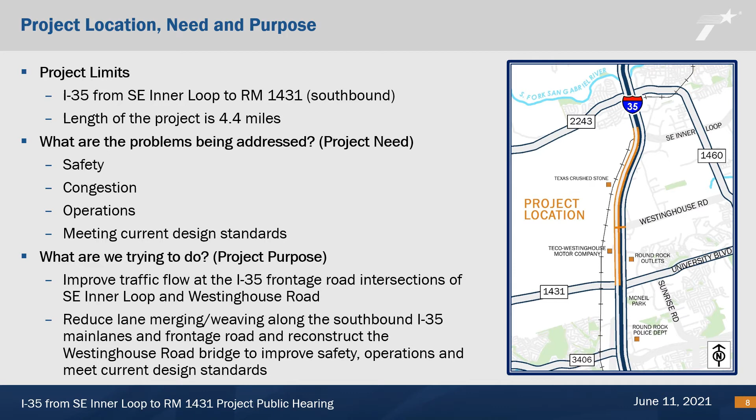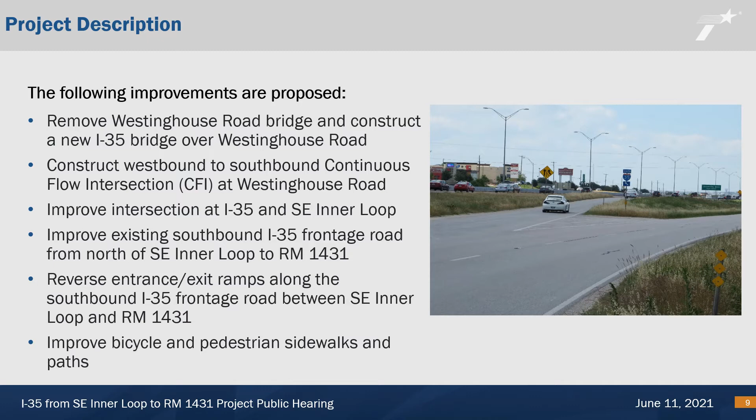The following improvements are proposed: remove the Westinghouse Road Bridge and construct a new I-35 bridge over Westinghouse Road; construct a westbound to southbound continuous flow intersection at Westinghouse Road; improve the intersection at I-35 and Southeast Inner Loop; improve the existing southbound I-35 frontage road from north of Southeast Inner Loop to RM 1431; reverse entrance and exit ramps along the southbound I-35 frontage road between Southeast Inner Loop and RM 1431, and improve bicycle and pedestrian sidewalks and paths.

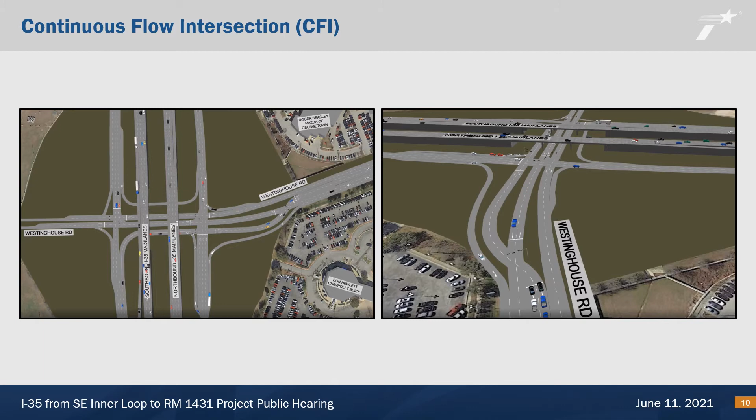The project proposes to reconstruct I-35 at the Westinghouse Road intersection from a traditional diamond intersection to an innovative intersection called a continuous flow intersection, or CFI. In a CFI, the Westinghouse Road left turn lane would be shifted to the outside edge of the road, allowing through traffic to move through the middle of the intersection simultaneously. A CFI increases the number of vehicles that can make it through the intersection in a single traffic light cycle.

The next few slides show typical cross-sections at key locations in the proposed project area. These typical sections provide the existing configuration and a preview of what the proposed improvements could look like. You can view the typical sections for the I-35 from Southeast Inner Loop to RM 1431 project, as well as other project information on the virtual public hearing website through June 26, 2021.

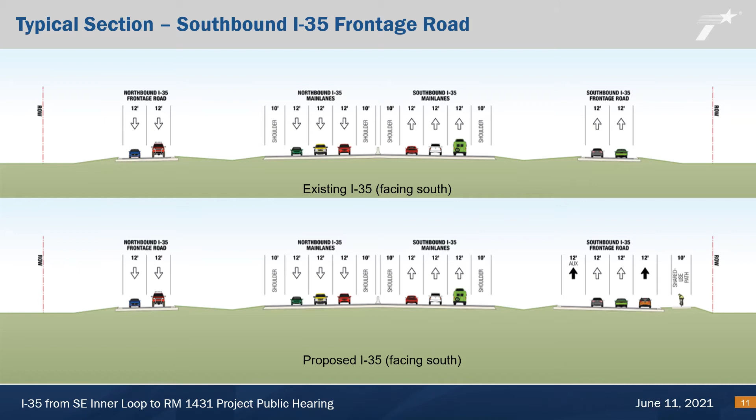The top image depicts the existing conditions of I-35 facing south. The bottom image shows the proposed configuration at the same location. The proposed configuration would include an additional through lane on the southbound frontage road, plus an auxiliary lane between ramp exits and entrances. A 10-foot shared use path along the southbound I-35 frontage road is also included in the proposed design.

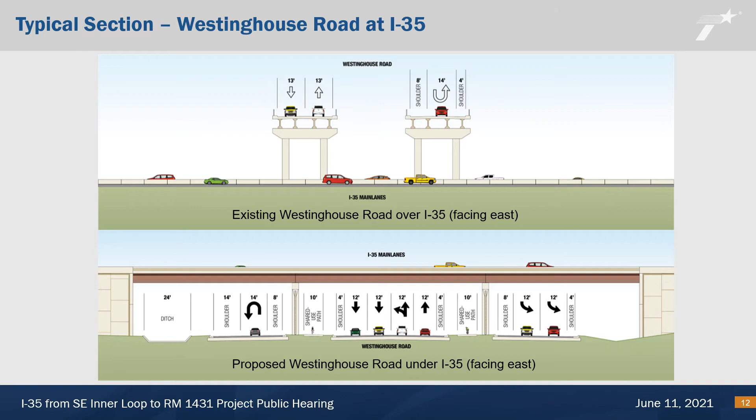The next set of typical sections are located along Westinghouse Road at I-35 facing east. The top image depicts the existing conditions at this location. The bottom image shows the proposed configuration at the same location. The proposed configuration would include Westinghouse Road traveling under I-35, improved intersection turning movements, and the addition of 8 to 10-foot shared use paths along eastbound and westbound Westinghouse Road.

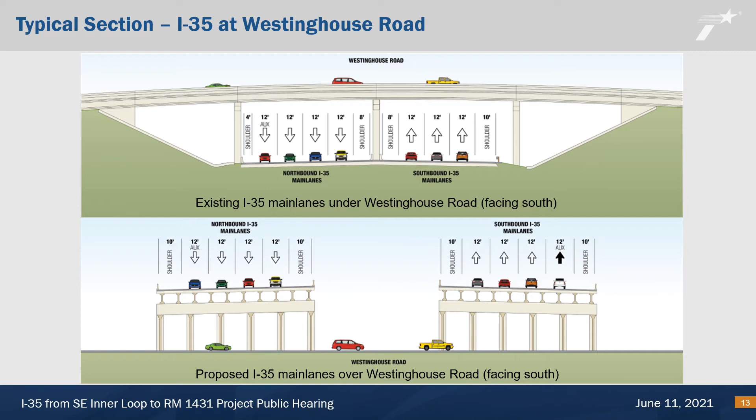The pictures here show the typical sections located along I-35 at Westinghouse Road facing south. The top image depicts the existing conditions at this location. The bottom image shows the proposed configuration at the same location. The proposed configuration would include I-35 traveling over Westinghouse Road and the addition of auxiliary lanes between ramp entrances and exits.

The proposed southbound I-35 frontage road would consist of 3 lanes plus an auxiliary lane where applicable. The southbound I-35 frontage road would be realigned, and the two-way driveway in front of Inner Space Cavern would be removed. The existing southbound I-35 entrance ramp just south of the Southeast Inner Loop intersection would be removed. A left turn lane would be added to the northbound I-35 frontage road at Southeast Inner Loop.

Southeast Inner Loop would consist of 2 lanes in the eastbound direction and 3 lanes in the westbound direction. New traffic signals would be installed at the intersection of Southeast Inner Loop and the I-35 frontage roads and Austin Avenue. The proposed project includes repaving portions of Austin Avenue and the northbound I-35 frontage road just south of the Southeast Inner Loop intersection. An eastbound to southbound right turn lane is proposed at Southeast Inner Loop and the southbound I-35 frontage road. This project would also connect Southeast Inner Loop to the recently completed Southwest Bypass project.

10-foot shared use paths along the southbound I-35 frontage road, a section of the northbound I-35 frontage road, and the east side of Austin Avenue are included in the proposed design. An 8 to 10-foot shared use path along the south side of Southeast Inner Loop is also included in the proposed design. Driveways to adjacent properties would be reconstructed.

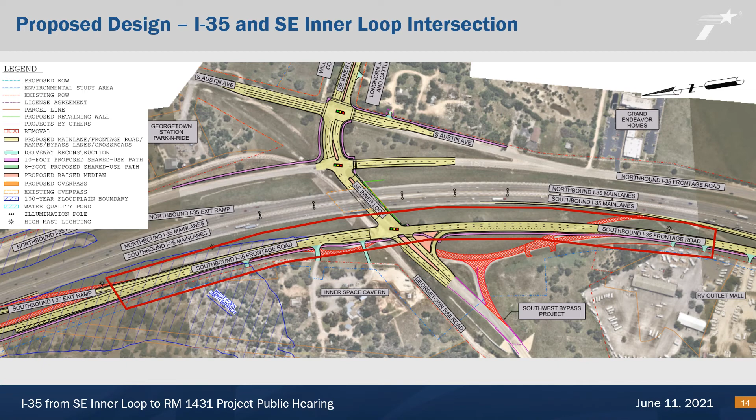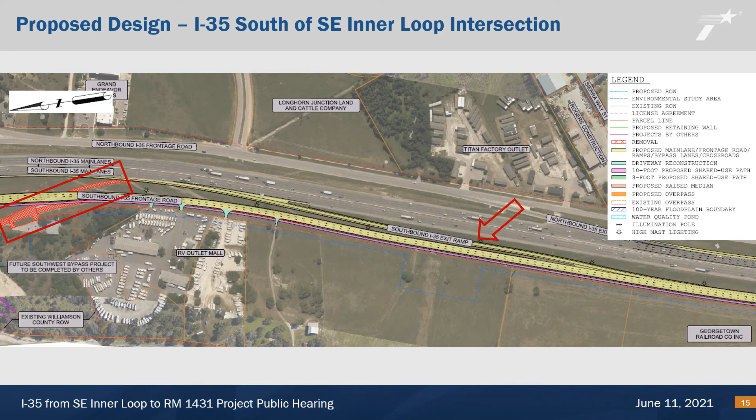Shown here is a view of the layout along I-35 just south of the intersection with Southeast Inner Loop. The existing southbound I-35 entrance ramp just south of the Southeast Inner Loop intersection would be replaced with the proposed southbound I-35 exit ramp to Westinghouse Road at this location. 10-foot shared use paths along the southbound I-35 frontage road are included in the proposed design. Driveways to adjacent properties would be reconstructed.

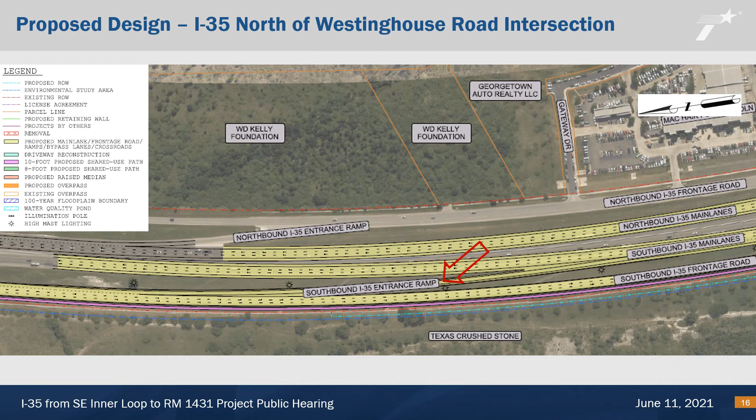Shown here is a view of the layout along I-35 just north of the intersection with Westinghouse Road. The existing southbound I-35 exit ramp to Westinghouse Road, shown on the following slide, would be replaced with the proposed southbound I-35 entrance ramp from Southeast Inner Loop at this location. The proposed project includes repaving the southbound and northbound I-35 main lanes at this location. 10-foot shared use paths along the southbound I-35 frontage road are included in the proposed design.

Shown here is a view of the proposed improvements to the I-35 and Westinghouse Road intersection. Both the southbound and northbound frontage roads would be realigned at the intersection with Westinghouse Road. The proposed interchange would include turnaround lanes from both southbound and northbound frontage roads. The I-35 main lanes are proposed to travel over Westinghouse Road instead of the existing configuration with Westinghouse Road over I-35. A raised median would be installed between the southbound and northbound main lanes from Gateway Drive to Page Whitney Parkway.

The proposed Westinghouse Road would include 2 lanes in each direction with traffic signals at the intersection of I-35 and the northbound and southbound frontage roads. A proposed protected right turn at each approach would allow for direct access onto the frontage roads. The intersection of Westinghouse Road and the northbound I-35 frontage road is proposed to be reconstructed from a traditional intersection to a partial continuous flow intersection, or CFI, with 2 additional left turn lanes in the westbound to southbound directions.

10-foot shared use paths along the southbound and northbound I-35 frontage roads are included in the proposed design. 8 to 10-foot shared use paths on both sides of Westinghouse Road from the southbound I-35 frontage road to the intersection with Kelly Drive Hewlett Loop are included in the proposed design. Driveways to adjacent properties would be reconstructed.

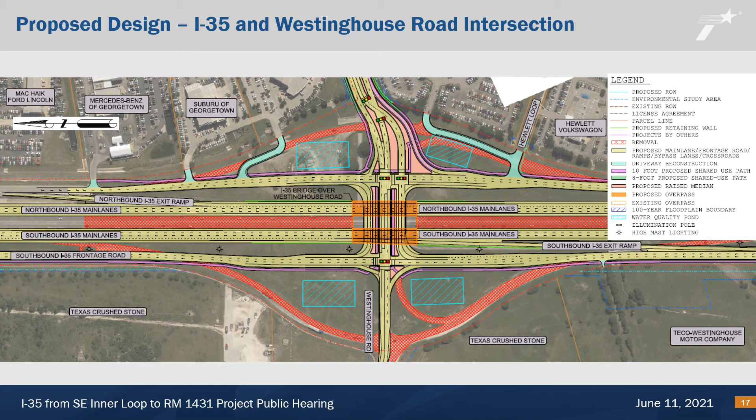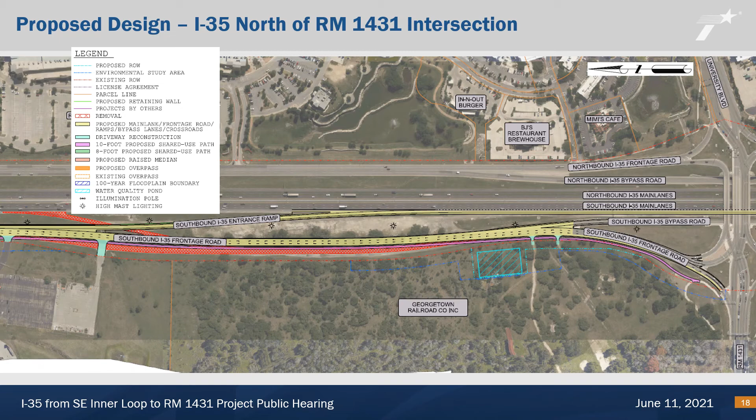The southbound frontage road would be realigned to accommodate the proposed shared use path. 10-foot shared use paths along the southbound I-35 frontage road are included in the proposed design. Driveways to adjacent properties would be reconstructed.

Utility adjustments and relocations throughout the corridor are required prior to construction. The adjustments and relocation of any utilities would be managed so that no substantial interruptions occur in utility services.

The environmental study conducted for this project complies with the National Environmental Policy Act. Technical reports were prepared to evaluate potential impacts to the human and natural environment. These technical reports will be posted on the public hearing website.

Resources and issues being studied during the environmental process include air quality, community impacts, traffic noise, hazardous materials, historic and archaeological resources, land use and parkland, biological resources, threatened and endangered species, and water resources. The draft technical reports are available on the virtual public hearing website.

An analysis of water resources identified 4 stream crossings in the project area, including 2 crossings of West Fork Smith Branch, an unnamed tributary to Chandler Branch, and Chandler Branch. Proposed impacts to the West Fork Smith Branch would be addressed under the Nationwide Permit 14 and would not require reporting to the U.S. Army Corps of Engineers.

Proposed impacts to the unnamed tributary to Chandler Branch would be addressed under the Nationwide Permit 14 and would require a pre-construction notification to the U.S. Army Corps of Engineers. No impacts are anticipated to Chandler Branch.

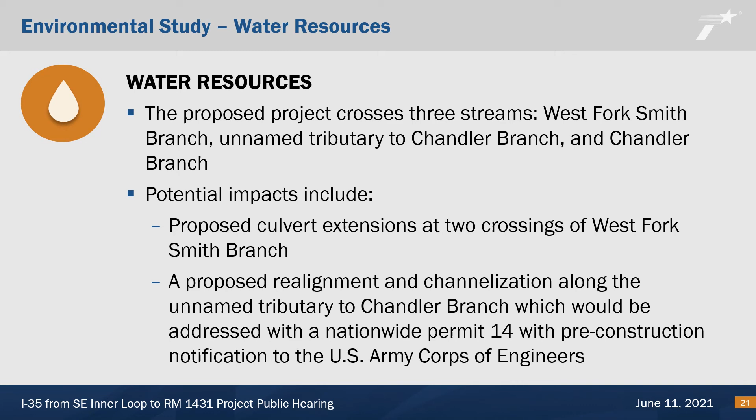A study was conducted on the potential impacts to threatened and endangered species. As part of this process, TxDOT consulted with the U.S. Fish and Wildlife Service on this project's effects to the Bone Cave harvestman, Coffin Cave mold beetle, Georgetown salamander, and Jollyville Plateau salamander. TxDOT also coordinated with the Texas Parks and Wildlife Department on potential impacts to state-listed species.

A study was conducted to determine the project's potential impacts to archaeological sites. The proposed right-of-way was recommended for archaeological survey to identify potential archaeological sites. Due to limited right of entry to adjacent properties, this project was conditionally cleared for archaeological resources in order to advance the environmental process and to acquire the proposed right-of-way. A survey will be conducted once the proposed right-of-way is acquired.

Let's talk about the right-of-way acquisition process. The proposed project would require the acquisition of approximately 6 acres of additional right-of-way. The proposed project would not displace any residential or non-residential properties.

Once environmental clearance has been obtained and the project has been fully authorized, TxDOT would commence the acquisition process. All right-of-way acquisition would be done in accordance with the Uniform Relocation Assistance and Real Property Acquisition Policies Act of 1970, commonly referred to as the Uniform Act.